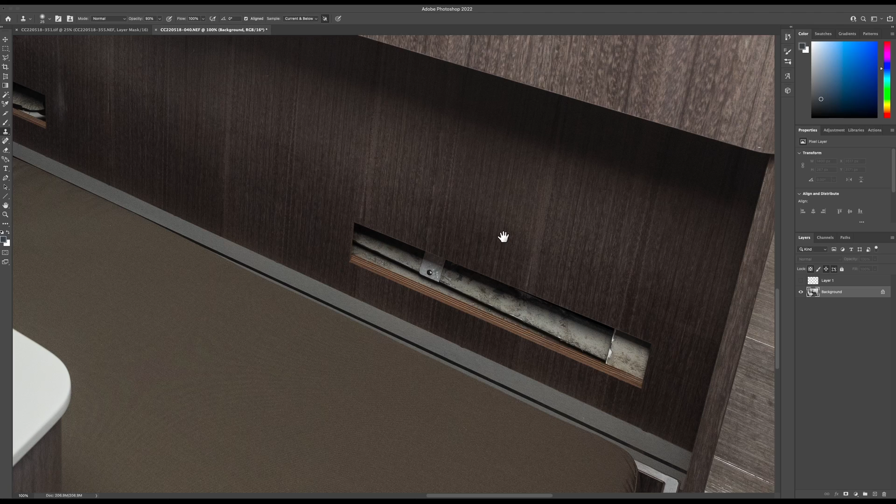Last week I shot this cabin as part of a new build yacht shoot. Unfortunately, the owner was taking delivery that afternoon and the boat wasn't quite finished, so we had to get on and shoot it as is. As you can see, there's some vents missing under this bunk because of supply chain issues or something.

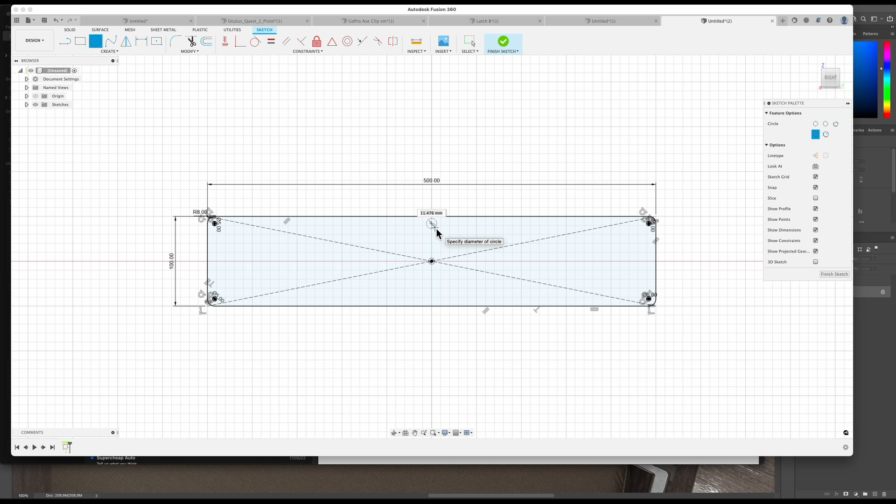So in Fusion 360, to quickly knock up some vents, 500 by 100 looks about the right proportions. Doesn't really matter. Rounding the corners, holes for screws, and extrude 4mm, feels about right. Make a key to cut out the slots and fillet the corners.

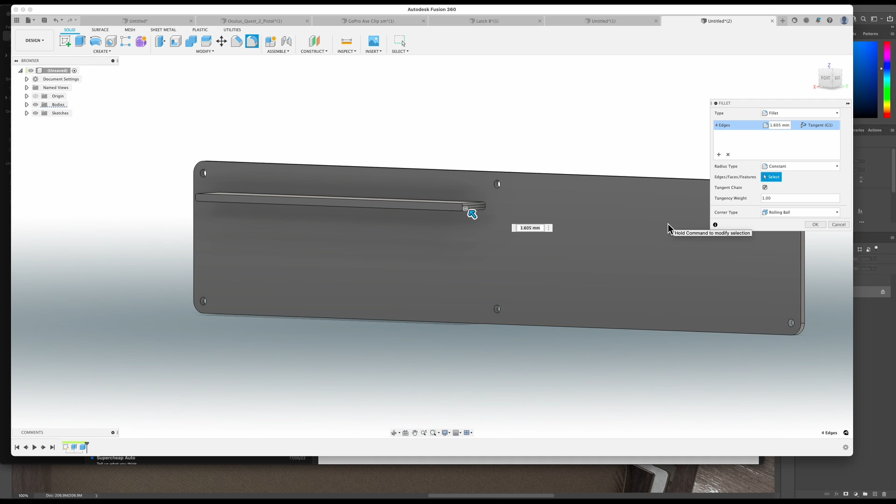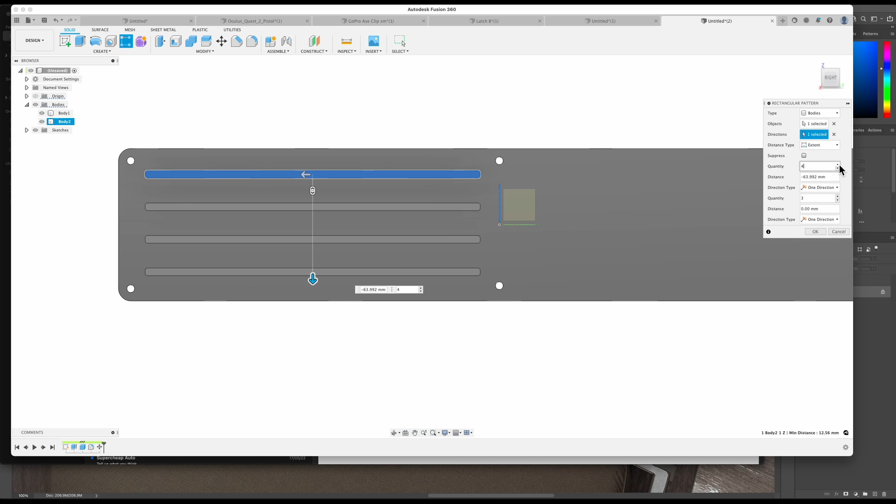Precisely guesstimate the position of the slot and use the array function to make some more. Duplicate across, then remove them.

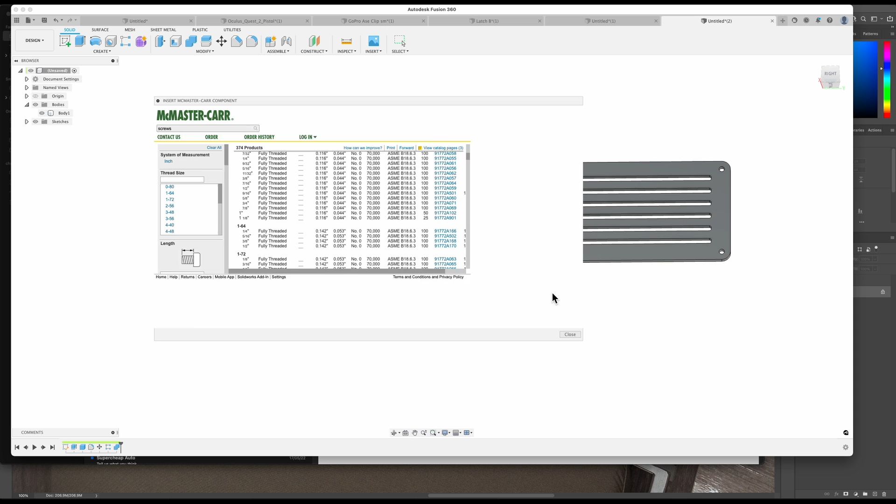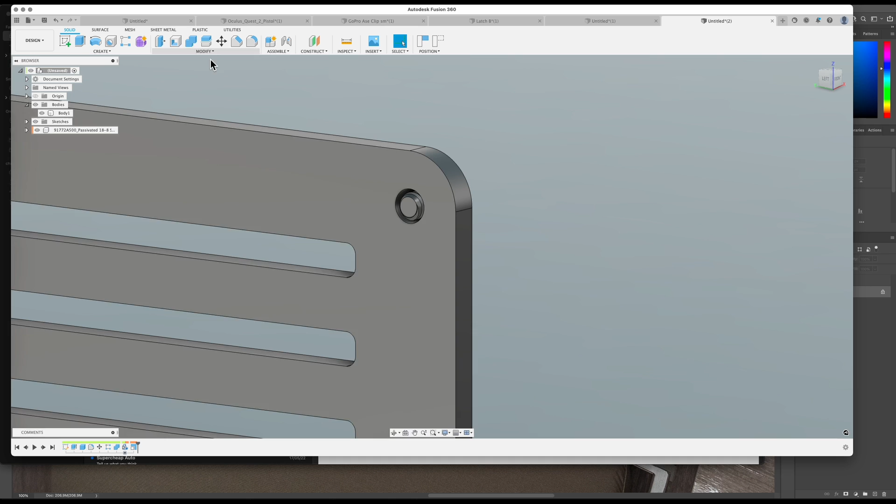Add some Phillips screws from the McMaster catalogue. Scale it to look about right and position using a line. Make a copy of it and drag it down. While watching the footage to make this voiceover, I realised that rather than making 4 screws and moving them and positioning them, I could have used the array tool again. Anyway, that's done.

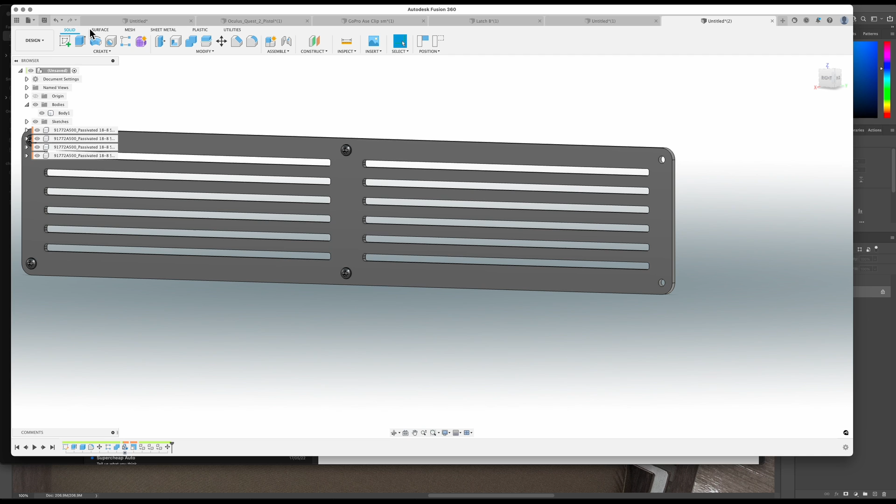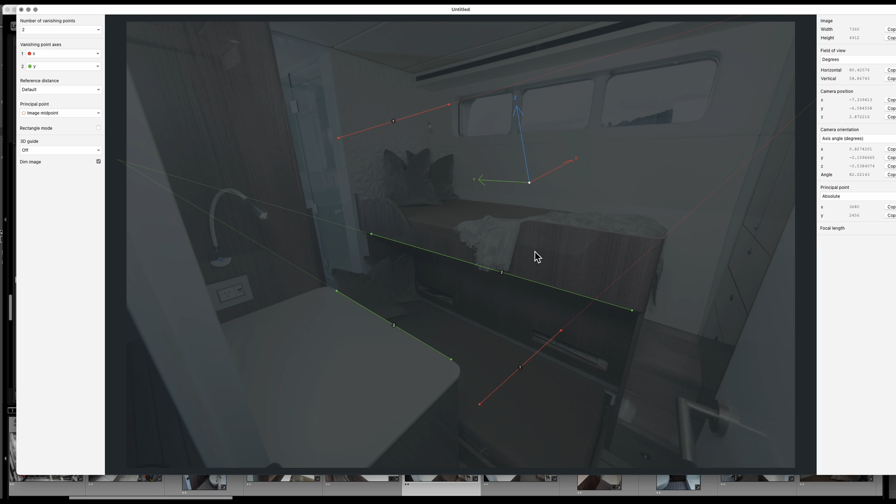Save as an OBJ. In FSpy, open the photo and move the locating lines onto perspective lines in the original photograph so that FSpy can do its thing. FSpy creates a file we can import into Blender that will align a virtual camera with the same focal length and perspective as was used to make the photo.

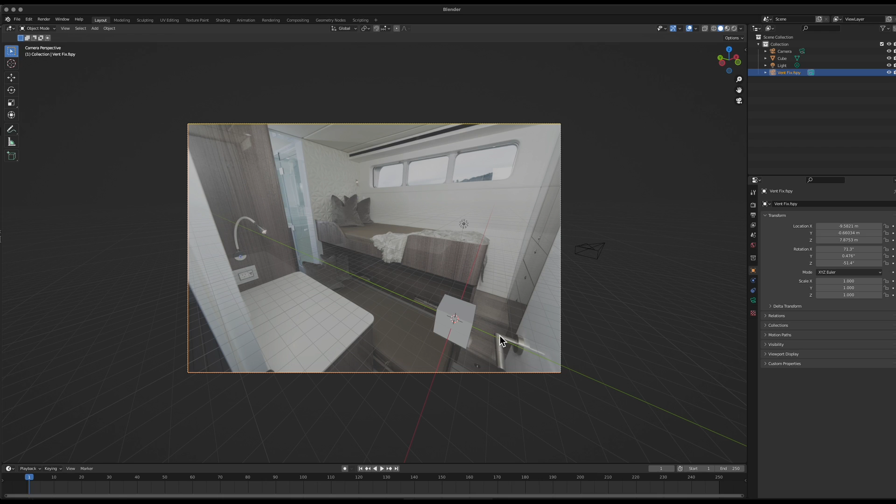In Blender, I import the fSpy file, have a quick look around to make sure everything's looking about right, and then do the usual Blender thing and delete the default cube, plus default camera and default light. Bring in the vent OBJ, scale, rotate, align, duplicate, align, until I've got 2 vents about where they need to be.

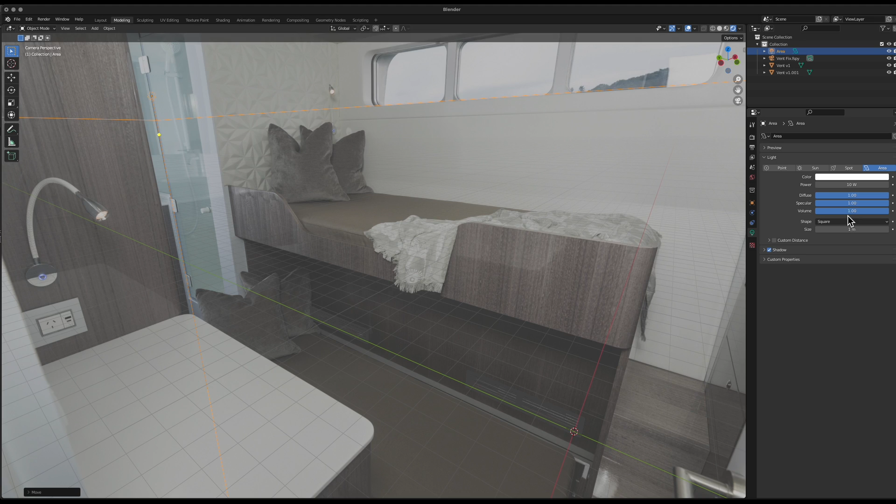Add a couple of area lights, fiddle with them for a while till they're having the desired effect. More power, less power, more power, I don't know. I'll be doing some fiddling in Photoshop, so it doesn't really matter. It's mostly about getting the amount of light feeling right. There is a shadow in the corner, so I wanted it to be more to the right than to the left.

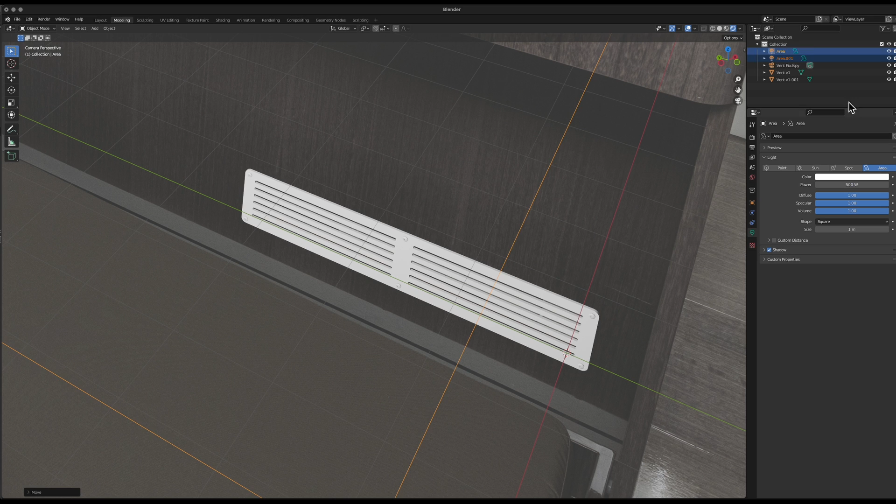I don't have time to re-watch YouTube tutorials on Blender materials, so I'm just going to add a very basic grey material to everything. I'm just trying to cover something that would have been noticed with something that hopefully won't be noticed.

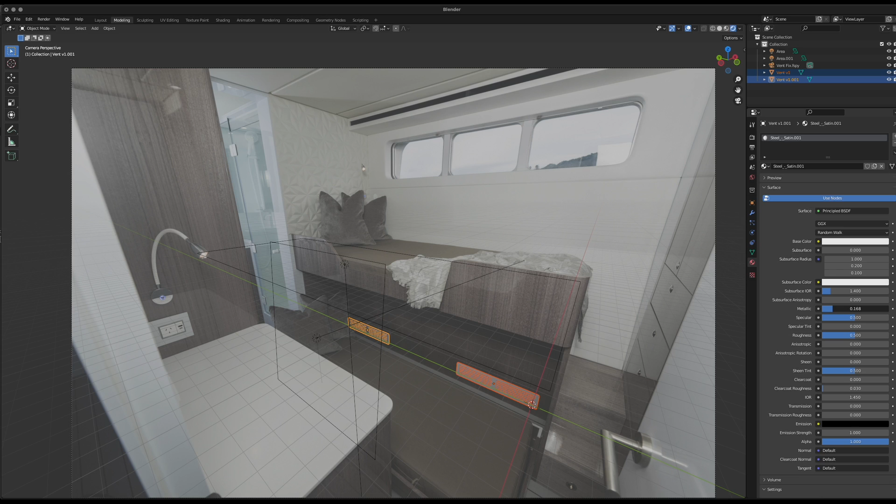In render properties, I set the render engine to Cycles so that we get the transparent option in the film tab and hit the render button. Save render as a PNG with RGBA color space checked so we get the transparency. A stands for alpha, so we need that for the transparency.

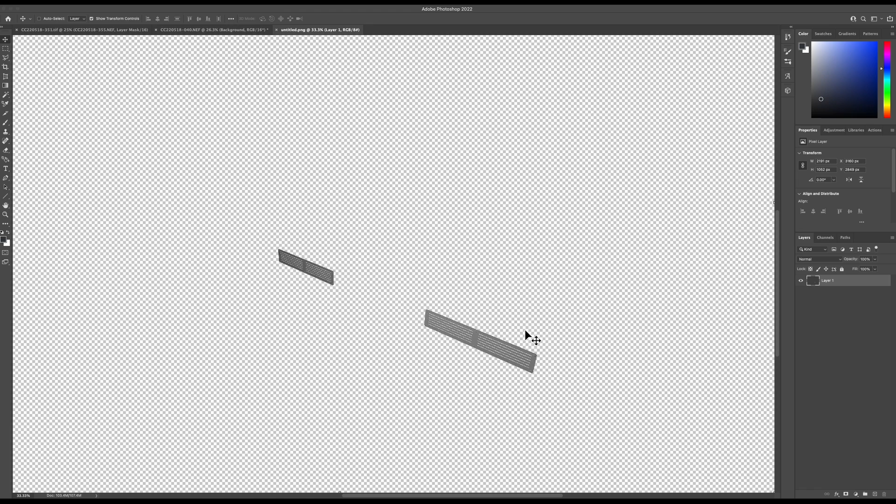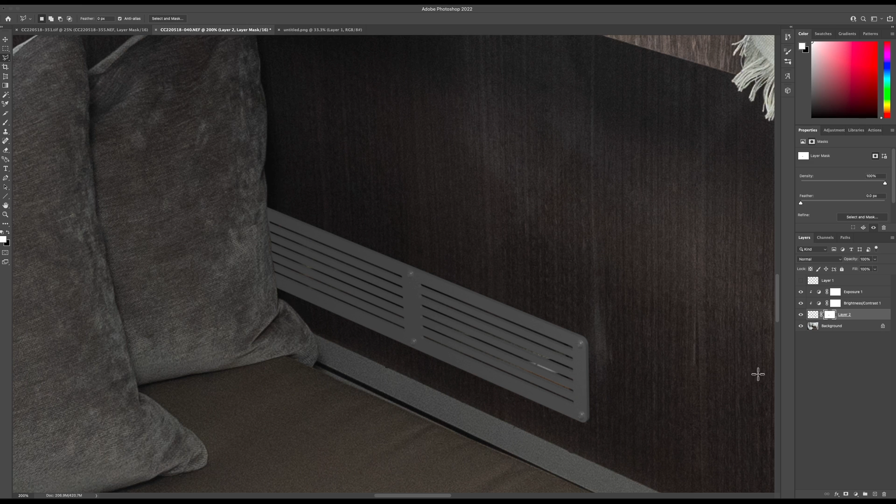Open the PNG in Photoshop and drag onto the cabin photo holding Shift so it aligns exactly. An adjustment layer or two to match the tones. Mask out the cushion. A little bit of shadow for the cushion using the burn tool, and there you have it.